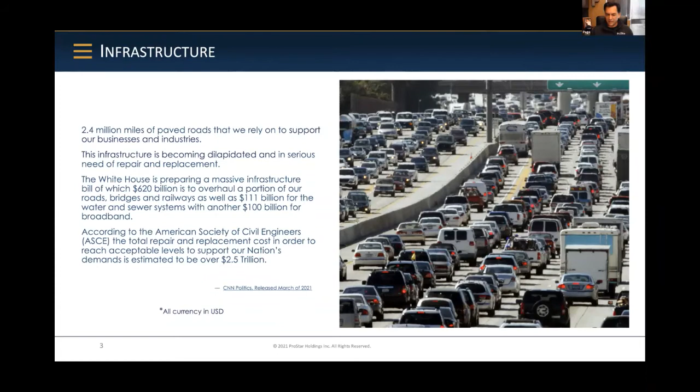In fact, well over 50% of the infrastructure that's buried below the ground was put into the ground over half a century ago. And if you think our surface infrastructure is becoming dilapidated and in serious need of repair and replacement, I would argue it pales in comparison to what's below the ground, because we really don't know what's going on below the ground because we can't see it.

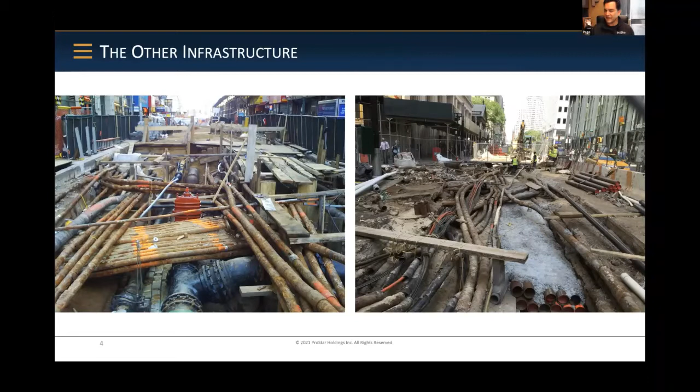And often by the time we know that there is an issue, it's too late. In fact, here's some statistics. So there's 35 million miles of buried utilities and pipelines in the United States. And over 500,000 times a year, those utilities or pipelines are hit during construction or repair of the utilities and pipelines. That equates to about a strike every minute of every working day.

And that number's growing anywhere between 16 to 19% per year. So it's only getting worse. And yet 100% of all construction projects are required by law to identify where these utilities and pipelines are before any digging can occur. In Canada, you have Click Before You Dig, and in the US, we have 811, Call Before You Dig.

It's estimated there's $10 billion spent in the US every year trying to identify where these utilities and pipelines are prior to construction. And yet we have over $30 billion of impact on our economy as a result of damages to utilities and pipelines during construction. So arguably, whatever we're doing, it's not working too well.

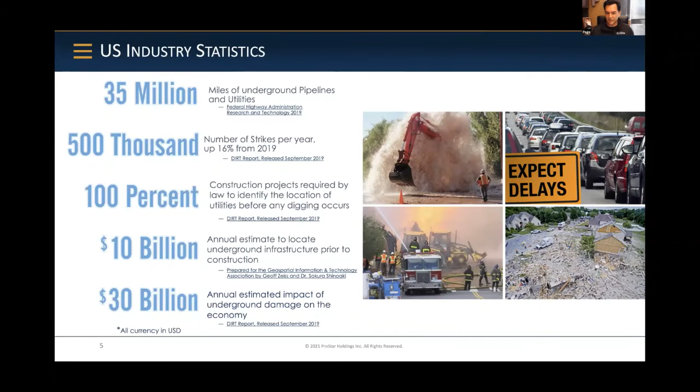I think Jeff alluded to that one of the issues that we have is how we're capturing this data and how we're managing the data. First of all, over 50 years ago, when a majority of the utilities and pipelines were put into the ground, there wasn't a great deal of regulation or compliance like there is today. But even over the last half century, the way that we've managed the data is based on as-builts. These are the original planning and design drawings of where these utilities and pipelines are intended to go into the ground.

But how they go into the ground and how they were planned to go in the ground can be two completely different scenarios. And it's a result of anomalies and all types of conditions once we get out into the real world where we're going to place these utilities and pipelines. Maybe the ground is too hard. There could be other obstacles in the way where they plan to put in the utility. Maybe there's already too many utilities there.

Plus the contractor has to place these into the ground in a timely manner. That's how he gets paid and that's how he's profitable. So he's going to take the path of least resistance. So they don't always go into the ground the way that they're planned to go into the ground. And yet the information that we rely on to identify where these utilities and pipelines are in the ground is actually based on these as-built drawings. So by nature, they're not correct.

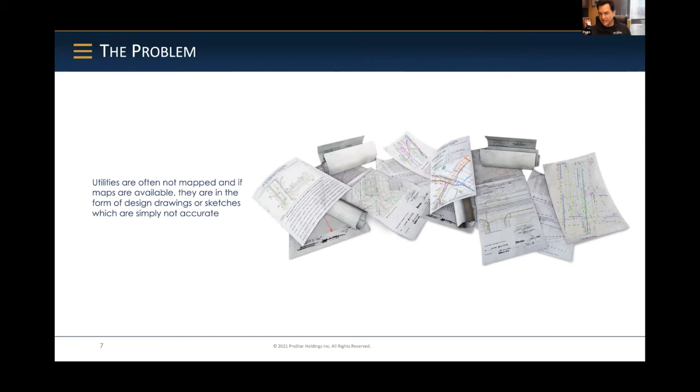The way that we identify where utilities and pipelines are is we call into Click Before You Dig or 811. The center takes the information that was provided to them by the utilities or pipelines, to their best knowledge of where they think their utility lines are. And then the center notifies the utility and pipeline companies that they have to go out and mark where their utilities are so that the construction crews and the excavating crews can avoid hitting those utility lines while they're digging.

What they do is they send out locators, which are utilizing these electromagnetic locate devices, which are designed to locate the utilities and the pipelines. Once they've identified where the utility is, then they mark it with a paint mark that is color coded to represent the utility line. So if it's red, it's power. If it's blue, it's water. If it's yellow, it's gas.

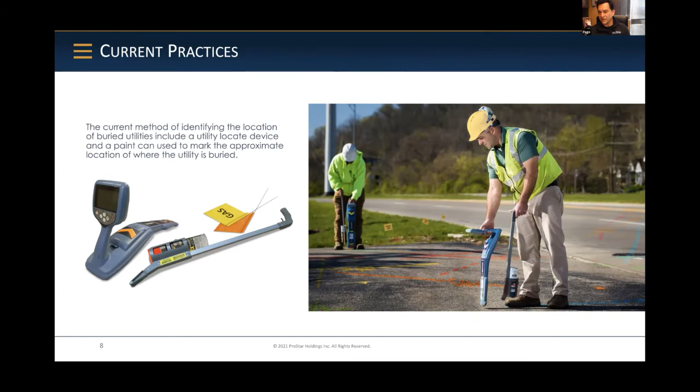It's industry knowledge that at best that marking is accurate to within 1 meter. That's the variance because of course there could be human error involved in this. In addition, you don't really know which utility he actually identified, and if it was the right utility, or if he even identified a utility at all. This practice has been going on for well over 2 decades, and it's gotten to the point where the construction and engineering companies and the excavators realize that they can't rely on those markings because they're the ones that actually take on the risk and the liability.

It's called daylighting. If they don't find the utility that was marked, then they'll move over a little bit and they'll dig another hole in the pavement and see if they can identify where the utilities are.

We're doing a project through I-70, which is 11 miles of expansion through Denver. It was one of the projects that Rob Martindale alluded to, and it's Kiewit that is actually doing the construction on that project. To date, they've dug over 33,000 holes. That number is going to grow because the project is going to continue for a longer period of time. But that's a lot of disruption, number one, on the pavement. It makes a mess. It's a very onerous process. It's a very expensive process, and it's also very time consuming.

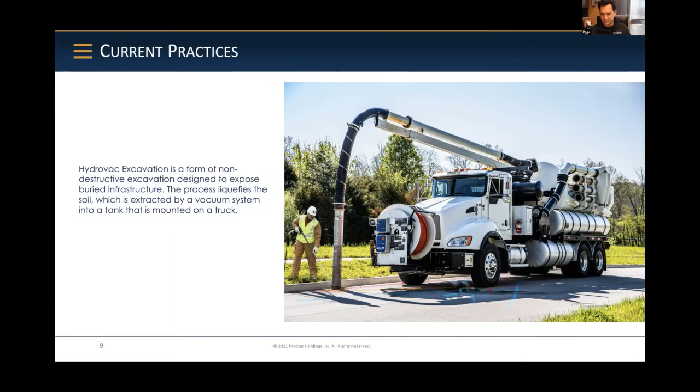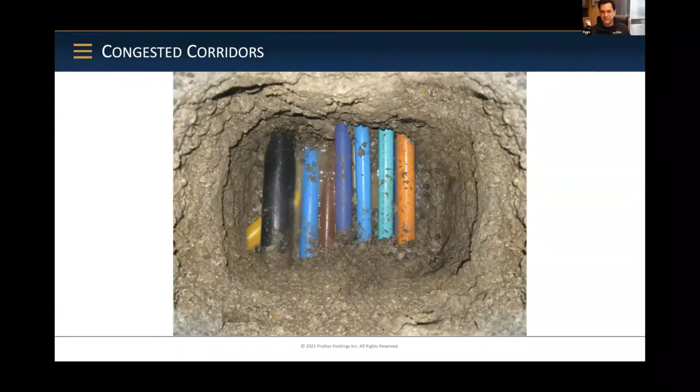In addition to that, part of the problem is the ability to share information in a timely manner and in a standardized format. This is the current workflow process. You identify where the utilities are, either through the electromagnetic locate tool or the hydrovacing, and then you send engineering and surveying crews out there to survey in the markings or where the holes are. Then you upload the data to a PC out in the field. That data is qualified by someone out in the field.

And then they export the data back to the office where it's imported into a computer-aided or CAD system or GIS system, once again qualified by the CAD or GIS department manager. And then that information is then provided out onto the project site where it's most needed so they can make more intelligent business decisions. This can take up to 2 days, 2 weeks, even 2 months.

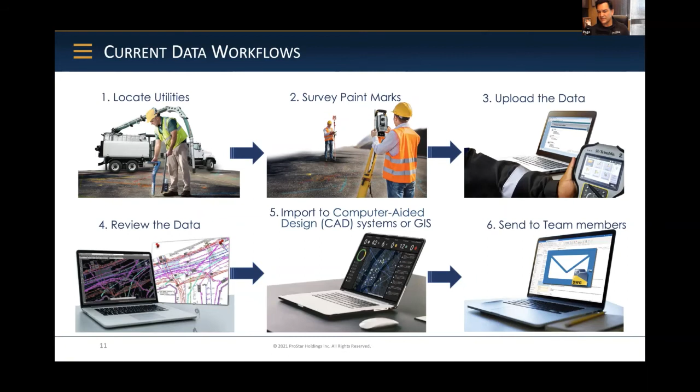So what we did is we developed a solution that can address all of those dated and archaic workflow processes and business practices that have been well entrenched into the construction industry for over 2 decades. In fact, it's a well-known fact that the construction industry is a lagger when it comes to adopting modern technology. But today, I'm not here to promote our product. I'm here more to talk about just where I see the industry going and the transformation by adopting and leveraging modern cloud and mobile technologies.

So here's our process, and it's pretty simple. Basically, we take the electromagnetic locate tool and we pair it to any standard mobile device, mobile phone or tablet that you can go buy at Rogers, that's running our mobile app called PointMan. Then that pairs to a precision GPS receiver, which will provide centimeter accuracy. So it's not utilizing the GPS that's embedded into the device, which is accurate to about 1 to 3 meters on average. And then we take all the information that's been collected and we push that up to the cloud.

Our cloud's running on AWS. That's where we do all the post-processing, all the calculations. We run it against proprietary algorithms that we've created. And we make all that information available in real time. That's done in less than a second. This is what it looks like as far as how we're collecting the data and the data that we're capturing.

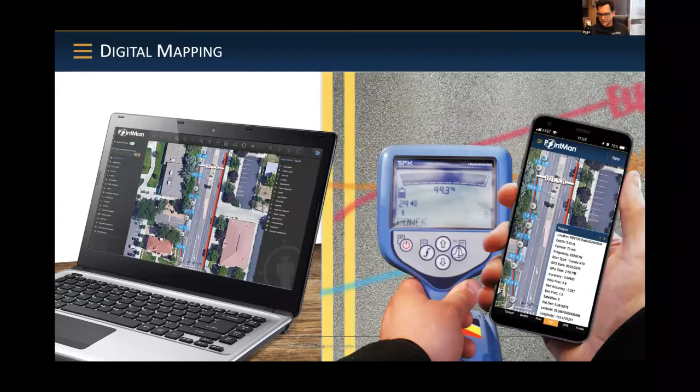So the more data we have and the more companies that are contributing in this process, then over time, the digital information of where the utilities are actually buried continues to improve. So our workflow process is pretty simple. Capture the data, it goes up to the cloud, and it's available out into the field or the office to anybody that needs that information in real time, including the construction company, the engineering company, even the excavator.

Here's some of the companies that are adopting our software. I call them major influencers. So Kiewit's the largest infrastructure construction company in North America, Fortune 500. As Rob mentioned, CDOT has mandated our software in the state of Colorado. So anyone that's involved in either owning or the construction or the management or maintenance of a utility or pipeline that's on a state right-of-way by law is required to use our solution.

KCI, which is one of the largest subsurface utility engineering firms in the US, was an early adopter of our software. But as a result, just over the last month, we've got companies like T2, which is a major subsurface utility engineering firm based in Canada, Kramer, a large construction company. Zayo is one of the top fiber optic companies in North America with operations in the US and Canada and the UK.

And then Bloodhound is actually the first locate company that I know of that's adopted a software that will actually digitally capture the precise location of where the utility or pipeline is buried and then share that information with the actual utility owner. And Bloodhound is a subsidiary of United States Infrastructure Corporation, which is the largest utility locate company in North America. So we're starting to see that adoption into the market as a result of some of these early adopters and what I call influencers.

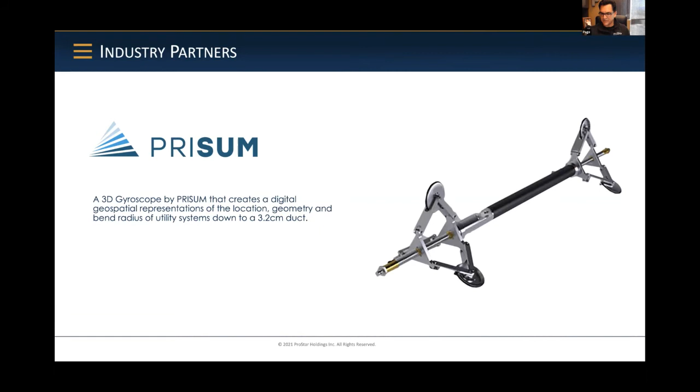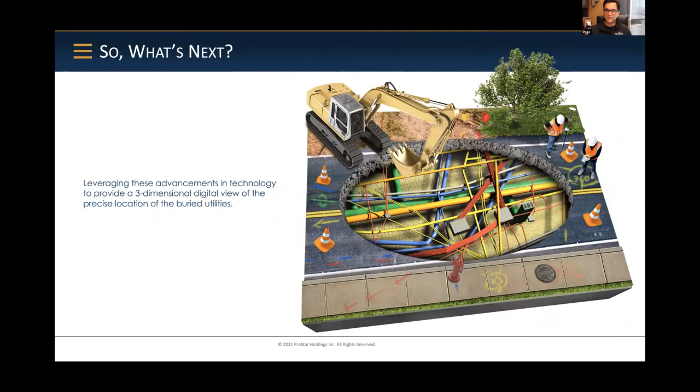So we're working with PRISUM to integrate that so that we can capture that information in real time digitally and then provide that to all the stakeholders. So what do I think is next? Well, I think what we're going to see over the next maybe even 12 months is leveraging all these advancements in technology to provide a three-dimensional digital view of the precise location of buried utilities.

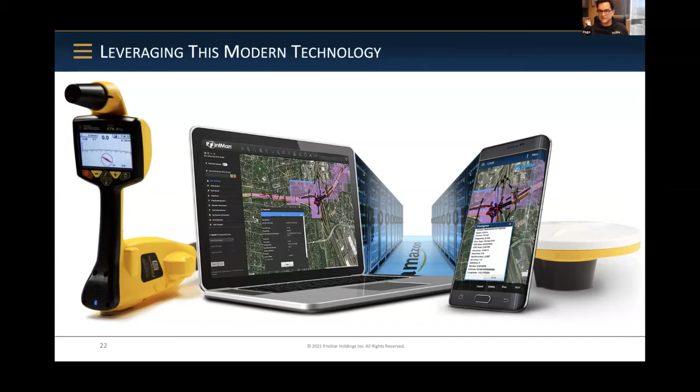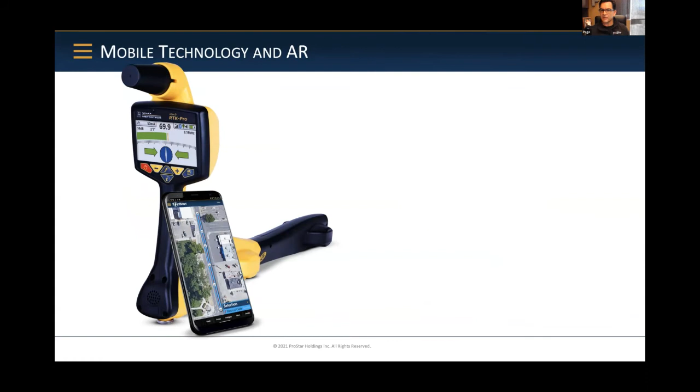And what we're going to do is leverage the modern technology that's already available to us today. There's nothing that we have to wait for. It's just all about integrating this into one seamless solution. So for example, taking what Vivax just created, which is the locate tool that has a precision GPS receiver embedded into it, and then capture that information, say for example, on our mobile app, PointMan, and then provide that information to a new technology that's now provided by Trimble, which is SiteVision with the Catalyst receiver.

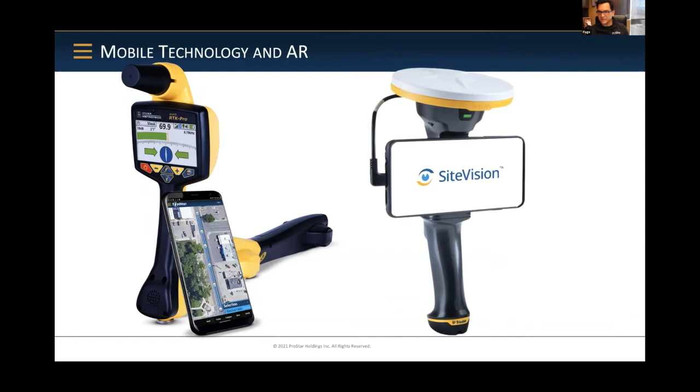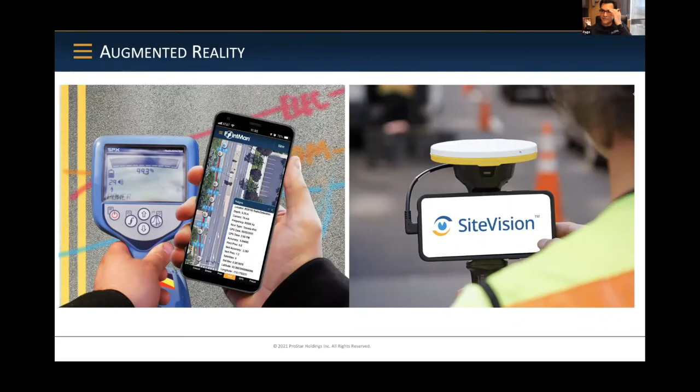What that is, that's a handheld augmented reality tool that has a precision GPS receiver built into it. So when you're out locating and we're capturing all this information digitally on PointMan on the mobile device and pushing that up into the cloud, then you make that information available in real time to someone that has the SiteVision augmented reality device in their hand. And what that would provide them immediately is a 3D view of all the utilities that are buried below the ground with accuracies down to a centimeter.

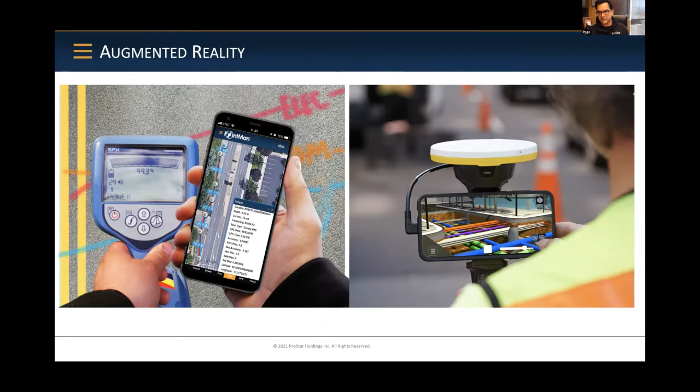So basically it provides the ability to see what lies beneath the ground in real time, but more importantly, with centimeter accuracy. If you don't have the accuracy, then it's just another pretty picture. The advantage to that is we could then share all that information in real time, say for example, to the excavator, to their heads-up display system. They would then also receive this information in real time.

And if there was a utility line that he did not know was in the area, especially within the area that he was digging, then it could provide automatic notification to them in real time that they need to call and have someone come out and identify where that utility is or expose it to reduce the chance of damaging that utility by hitting it.

Getting down to where I close, one of the big questions that comes up: this is great. You're going to have all this information, you're going to have digital records of it, and you're going to have all these stakeholders that need this information. But what about security? And I would argue that the utility and pipeline industry and construction industry is more sensitive about their data than the Department of Defense or the financial industry. And when you think about it, when I said this industry is a lagger, all other major industries have moved over to cloud and mobile technologies.

And of course, one of the things that they've addressed, which is one of the most critical issues, is data security. In fact, I would argue that having digital information is far more secure than the way that we're managing the records today, which in most cases is based on paper records. Every day in our daily lives, we're ordering goods on Amazon. I can even take a picture of a check and it will automatically show up in my bank account. That's because security protocols have been put into place. And if you follow those security protocols, then the data itself is very secure.